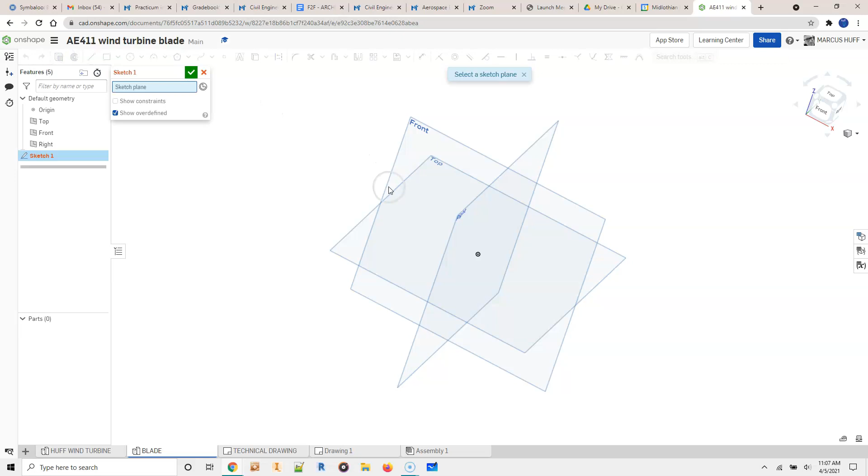So let's get started. We're going to hit sketch, choose the top plane, and I'm going to press N for normal to plane. We're going to start at the origin. I want the leading edge of my foil to start there, so I'm going to move this over.

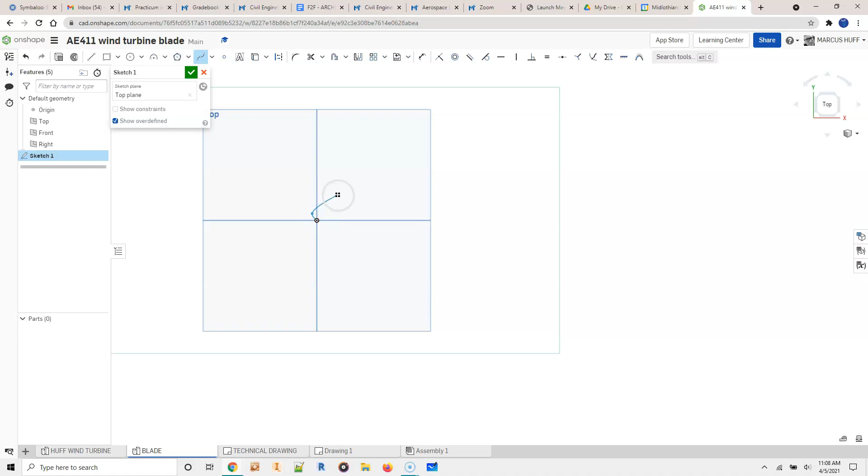We're going to use the spline tool. That's going to be the easiest one for us to make our shape. I'm just going to throw a few dots around here and think about the shape I want to create. So maybe something like that.

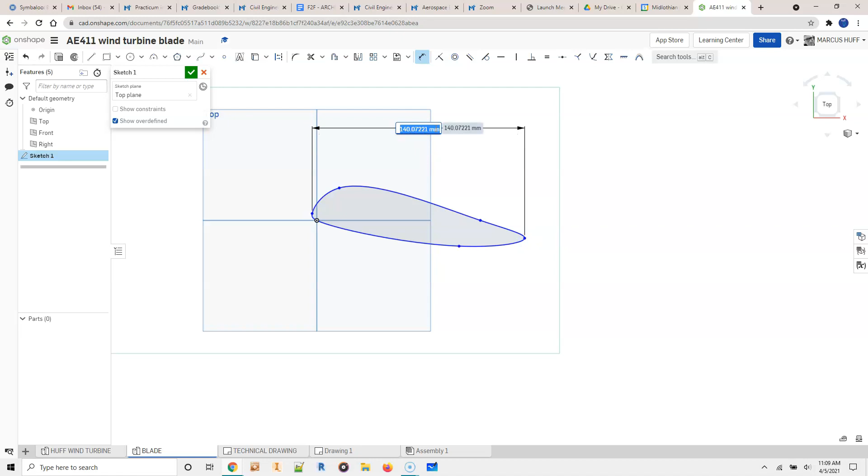One thing we want to make sure of is that our measured distance for this doesn't exceed about 60 millimeters. Right now it says 140, so I'm going to change that to 60, and it's going to shrink the shape.

Okay, so that's going to be my first airfoil. Would this be a great design for a wind turbine? No, but you get the idea.

Okay, so we're going to save that. Next thing we're going to do is switch to our isometric view.

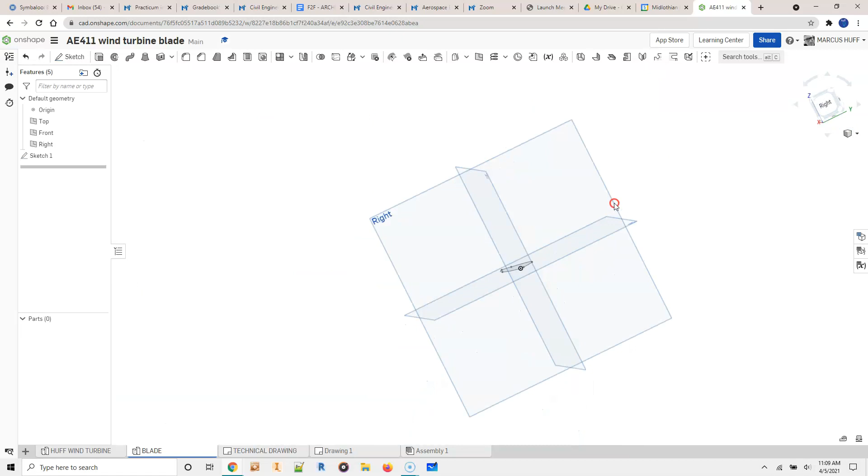Next we're going to use this top plane and add a work plane above it, so we want to move this up. Here you can specify distance. The maximum height I want to use is 120 millimeters. This is going to make it nice for 3D printing, so I can print it on any machine that I want.

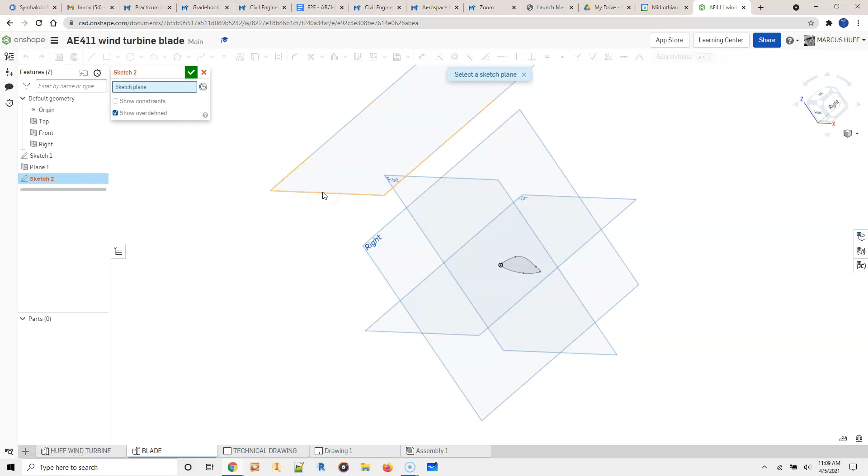Next thing we're going to do is press sketch and click that new plane we just added. I'm going to hit N for normal to plane. There it goes. Now what I want to think about is this is my bottom part, and you have to decide if you want the top to be smaller or larger.

If you want, you can do interim planes where something happens in the middle, like it might get bigger and then shrink down. That's the design choice for you to make, but for this I'm going to make this a little smaller and put it off over here.

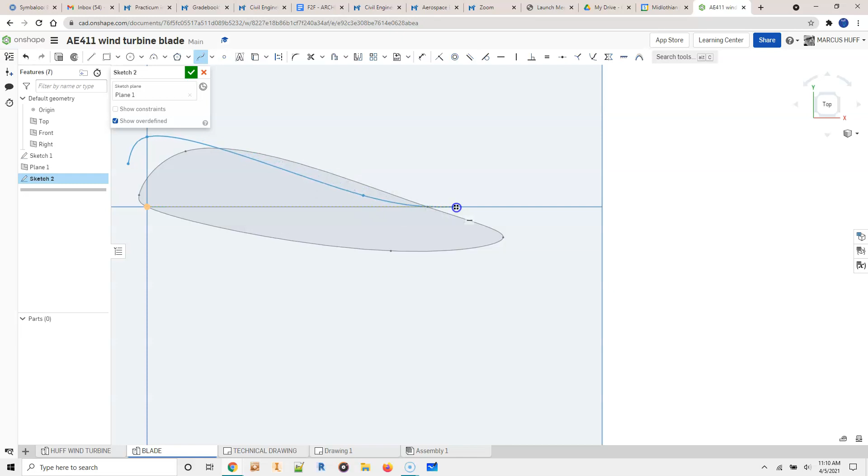So we're using the spline tool again, and I'm just going to make a top shape. Another thing I need to pay attention to is I need to keep enough space here such that when I add the hole, I have room for everything.

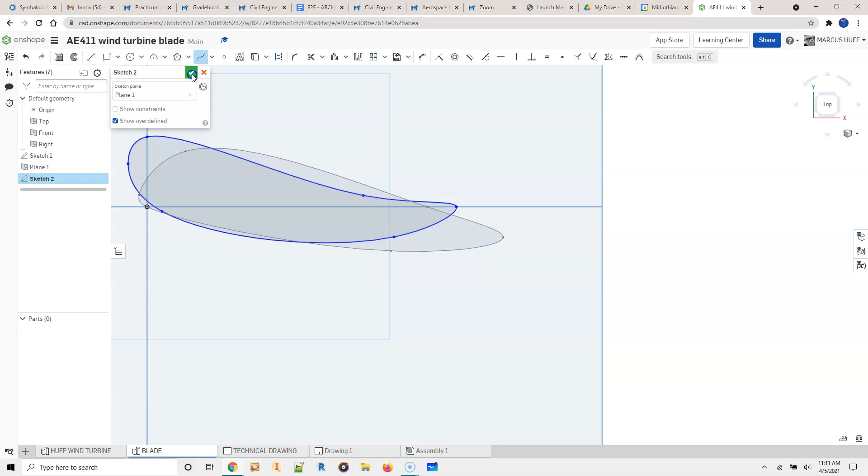So let's see what that's going to look like. Again, I would want to check dimensions. This is getting wider than 60 millimeters, and that's okay for this example.

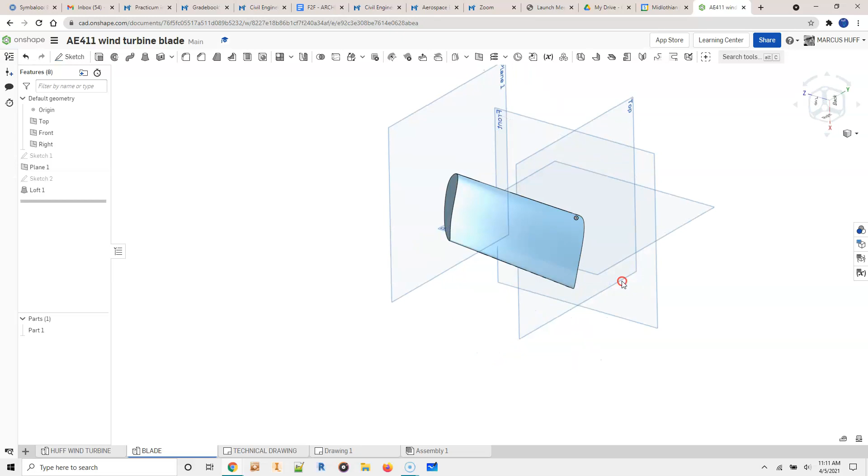Let's look at the next thing we're going to do, go to isometric, and now we're going to loft. Click this, choose the bottom profile and then the top profile, and it will connect those two. Then we just hit check. Now we can look around, and you can see it has kind of a twist at the top, and it's kind of leaning out.

Now we're going to look at the bottom part of this, and I'm going to extrude a hole. I don't have the exact dimensions yet, I'll get that to you. But we're going to click on this face and put our sketch there, and we're going to do a perfect circle.

We want that to be probably right there, and know that it's going to be bigger than that. I'm going to make it 9 and see if that works.

And then hit check, and now we're going to extrude that, removing. You can either go all the way through, or you can go to, let's say 80, no less than 80. That's going to give us a depth that we like.

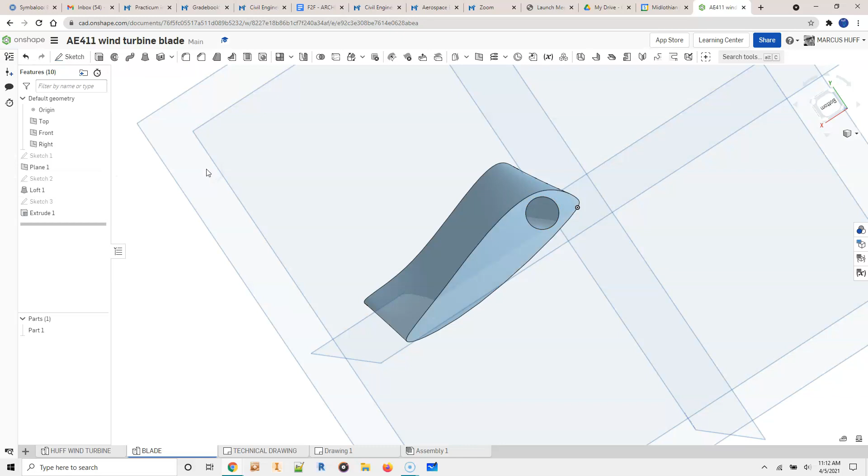So now that I've made that extrusion, I want to check to see if it cut through anywhere, and I don't see that it cut through. If you have a hole in the side of your foil, you know it didn't fit.

Another thing that we're going to run into is you can see the top of that is perfectly flat, and we need that not to be that way.

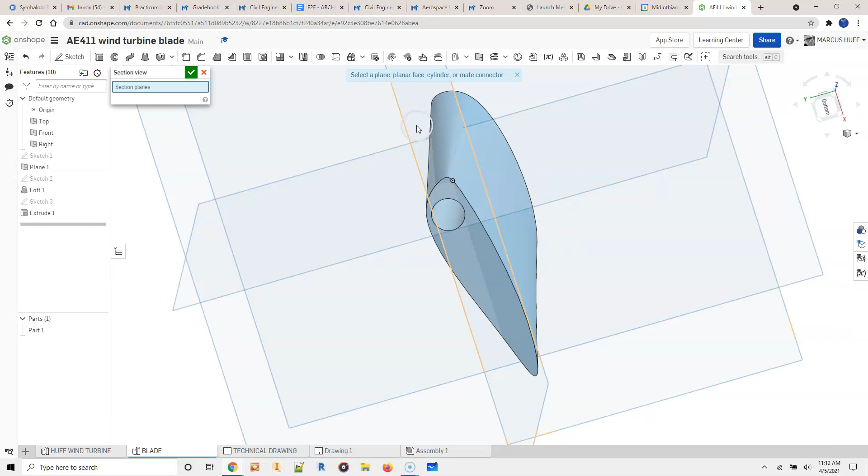So what we're going to do is go to this view cube and start a section view. I'm going to choose this plane and it's going to let us cut into there, and that is perfect because what I need to see is the top of the circle.

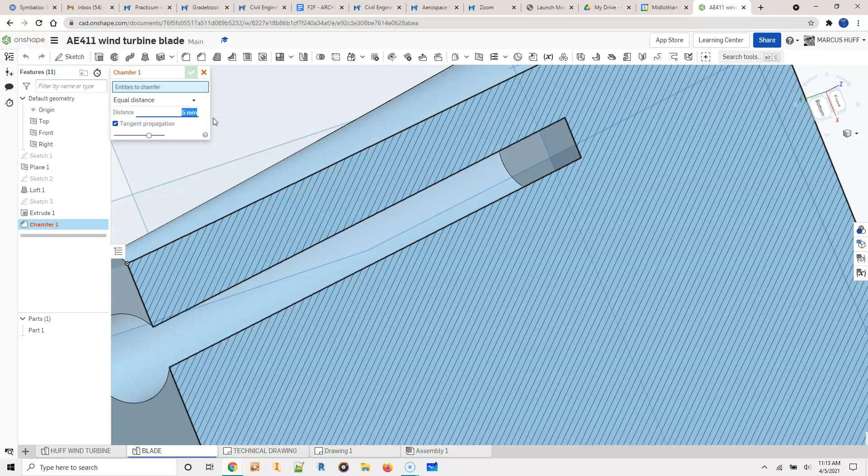And what we're going to do is choose chamfer, and it needs to be less than 5 millimeters because my diameter is 9, and if I use 5 it's going to overlap and it doesn't like that. So let's put in 4 and see if that works.

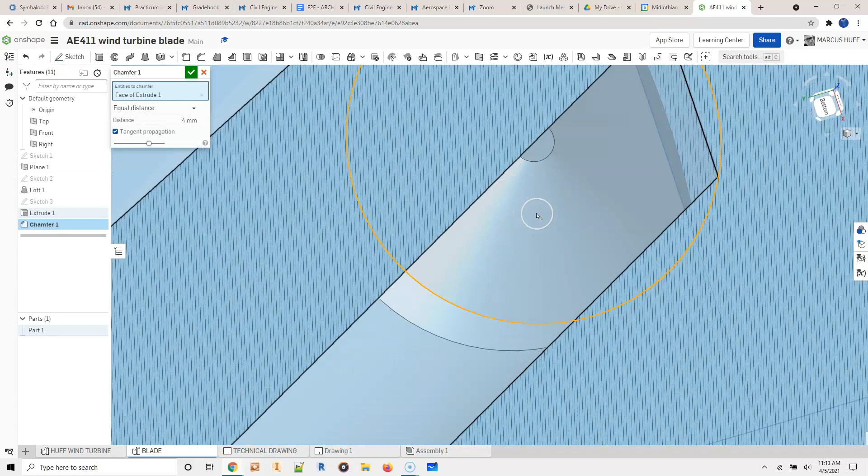I'm going to choose this top circle, and you can see right there that is the center point, so we want a little tiny circle right here. What this is doing is slanting the top to a point at a 45-degree angle, and doing that we can print this without supports.

My intent is to print these with a low quality, high speed print, and I also want it to print without supports. So that's why we're doing this.

All right, so once we get that done, we can turn off the section view, and if you zoom out and rotate this part, you'll see that the top of that hole is now chamfered, and that's going to print real nice. So we're going to go back to our isometric view, and that is an example of an airfoil you might design for a wind turbine.